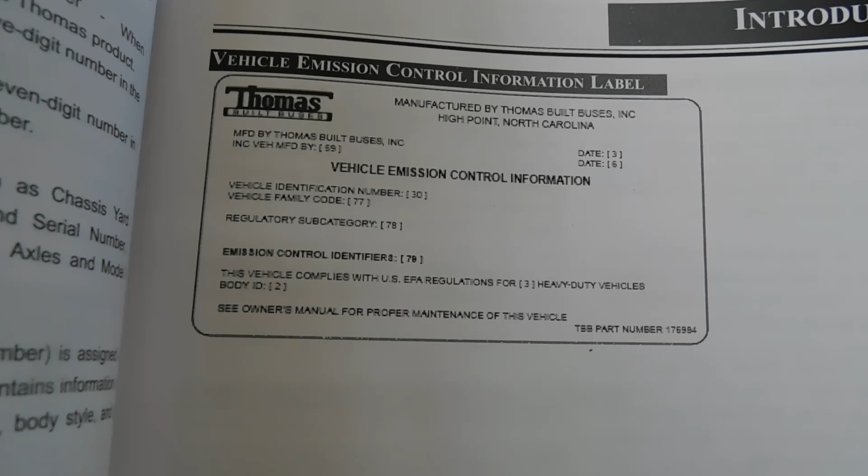So the first thing I'll show you is this sticker for the VIN. Basically it just has all the build information and the VIN and the body ID and all that stuff. And then you also have the vehicle emissions control information label - of course that's blank, but that's basically showing you what it would look like.

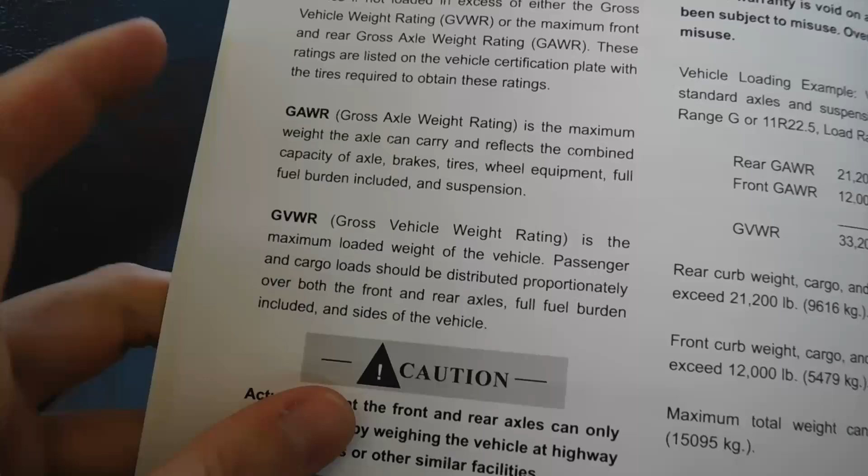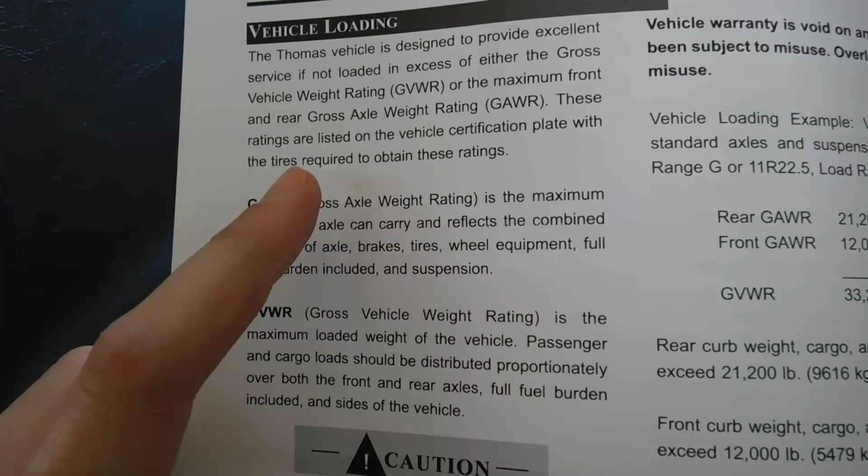They're just talking about the GAWR, which is the gross axle weight rating. Honestly, that is a term that I don't think I knew, so I'm learning something new, and I'm sure most of us all know the GVWR, which is gross vehicle weight rating.

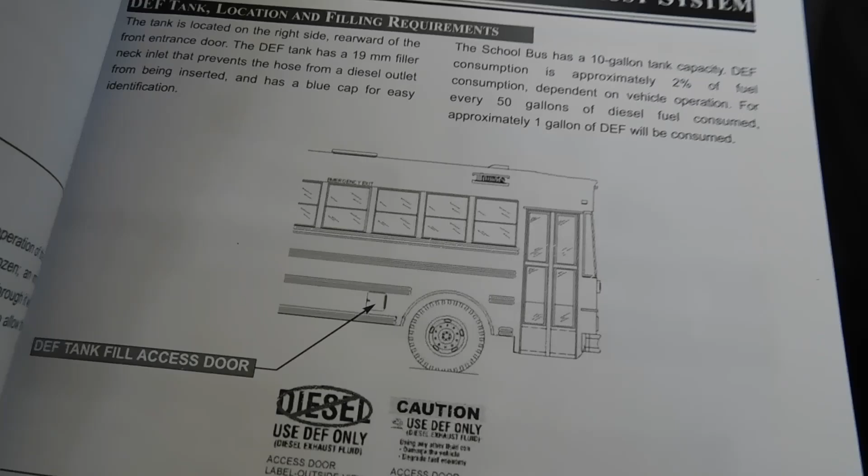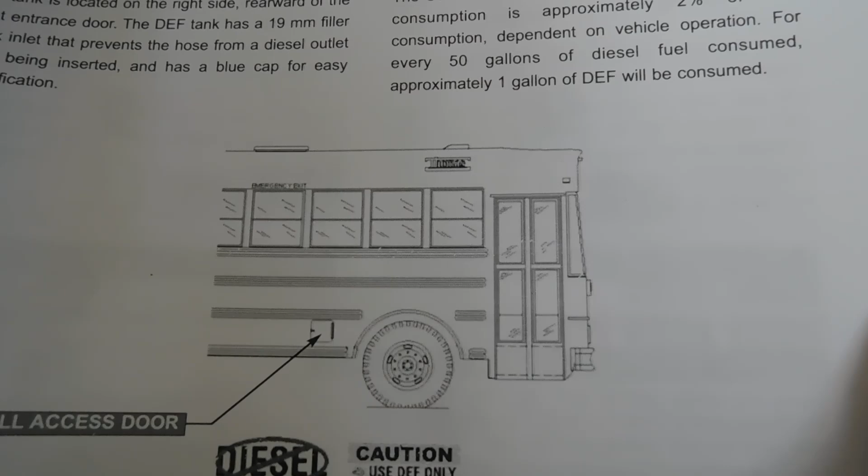So interestingly enough, in the section on the exhaust system, they do have a diagram of an EF, and you can tell that's the older front end, so that's not an EFX, but it's basically just showing you where the DEF tank fill access door is located on the bus.

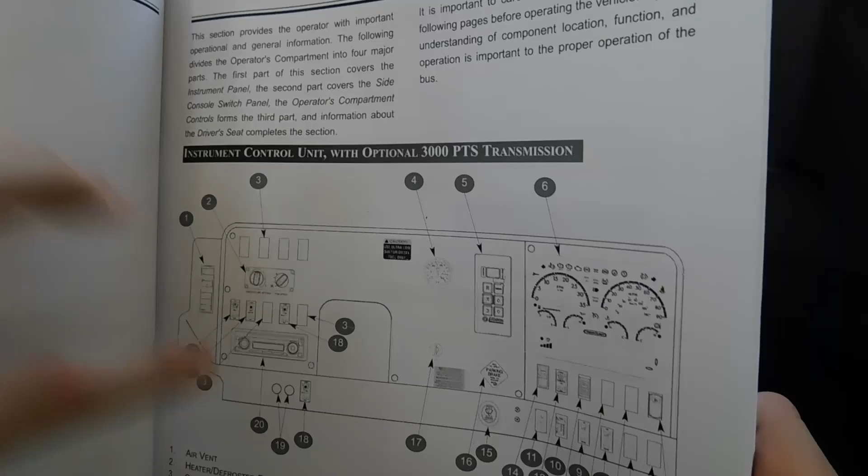So next we've got to look at the instrument control unit, which has always been an interesting thing to me. This one has the optional 3000 PTS transmission, so it's got a push button.

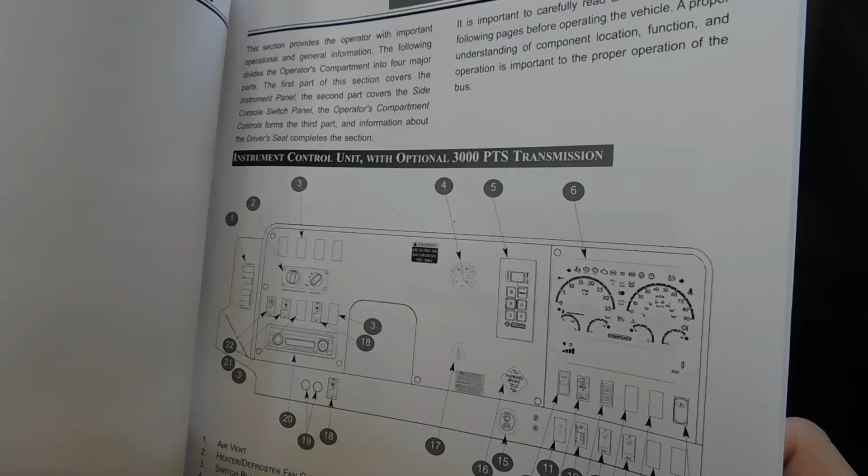The thing I've always found interesting with these buses, the EFXs and HDXs, is the location of the gauge cluster being to the right of the steering wheel. I've always thought that was odd. I've never... well, that's a lie, I've been on the EFX and HDXs, but I don't think I sat in the driver's seat of the EFX, though I know I've sat in an HDX driver's seat. I don't really care for how the gauge cluster is positioned, because you have to take your eyes away from the road. I mean, looking at a gauge cluster you might look down and that takes your eyes off the road too, but I'd rather look down than to the side, personally, but that's just me.

So over here, this is just kind of showing you the different parts you'll see up in the driver's area. You've got the driver's air vent, electronic heater and defroster. There's a switch blank. This is basically just telling you what everything is.

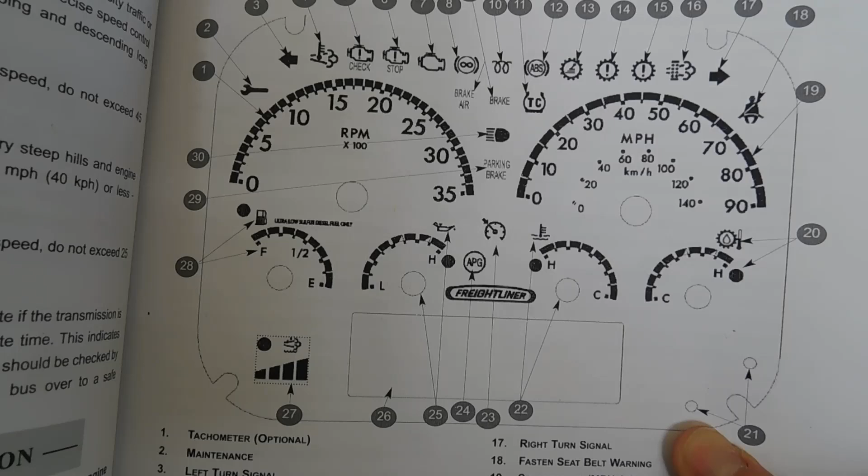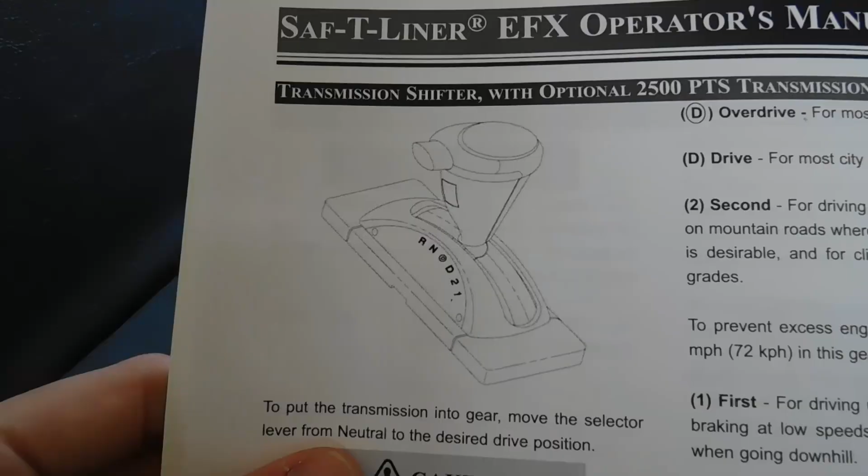First, here's a look at the EPA 10 instrument cluster, which I assume has all the stuff for EPA compliance, like the hot exhaust indicator and everything for a DEF bus. Here's a transmission shifter for a 2500 PTS transmission, which is a lever. But anyways, back to this — this is just a look at the instrument cluster.

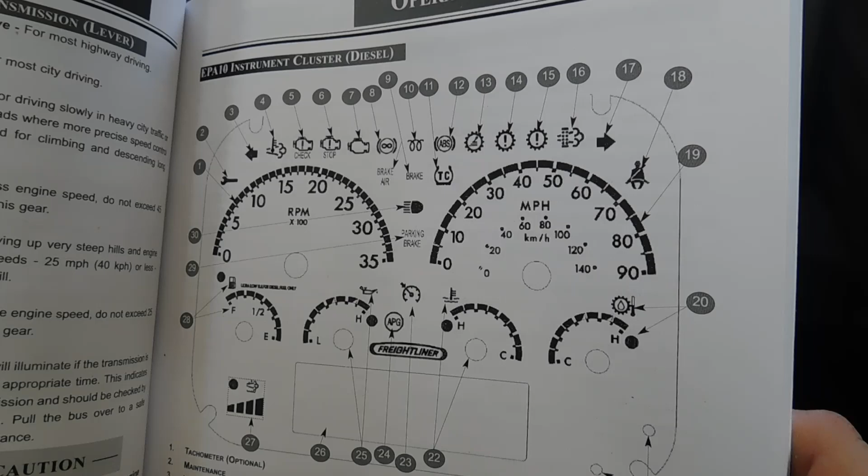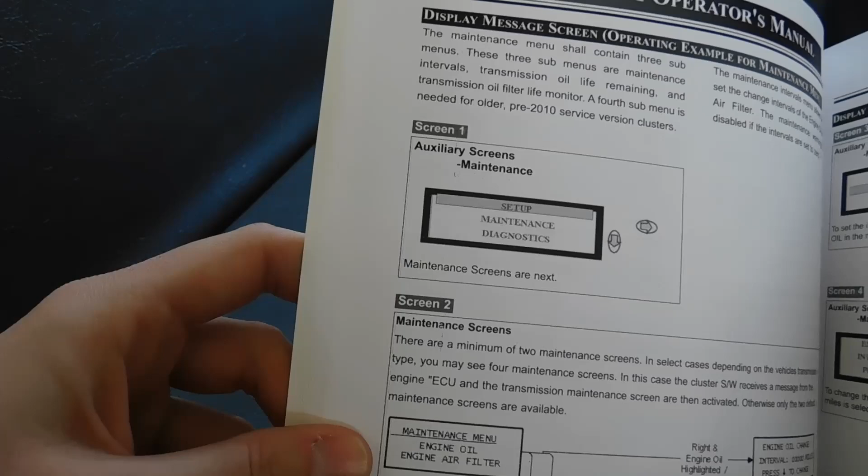They do have, moving forward, let's see what this is — we've got the display message screen, showing you the different things you can toggle through, and what the different messages might mean.

They also have all the different switches you can have on the bus. So you've got DPF, diesel particulate filter, manual regen switch, cruise control switch set and resume which is optional, cruise control switch on/off which is also optional. You've got the panel dimmer switch, headlight switch, pilot light switch with warning light symbol, 8-light warning, door control switch, windshield wiper/washer control and indicator, and the parking brake valve for air brakes, which you guys all know what that looks like.

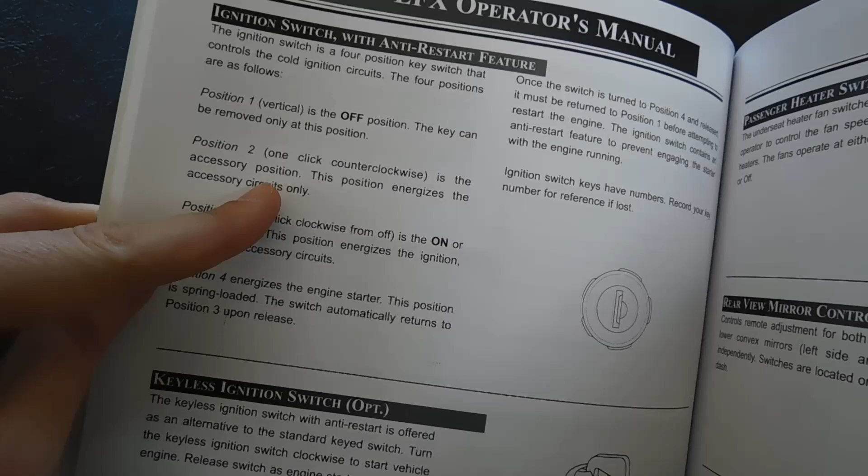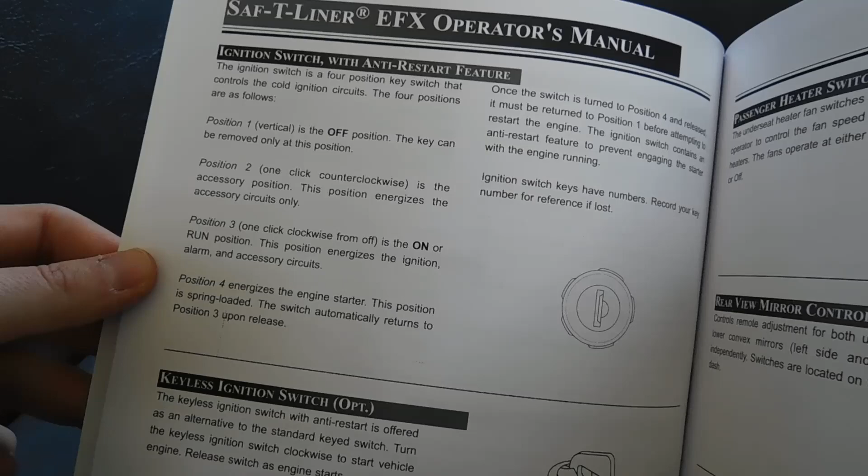Here's an ignition switch with anti-restart feature. It's an ignition switch with 4 positions: position 1 is off, position 2 is accessory, position 3 is run, and position 4 energizes the starter. The position is spring loaded — the switch automatically returns to position 3 upon release. So basically, a normal starter.

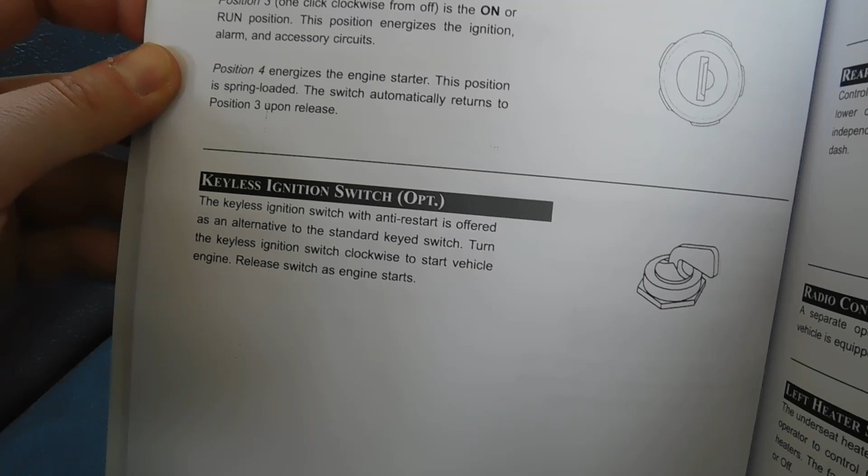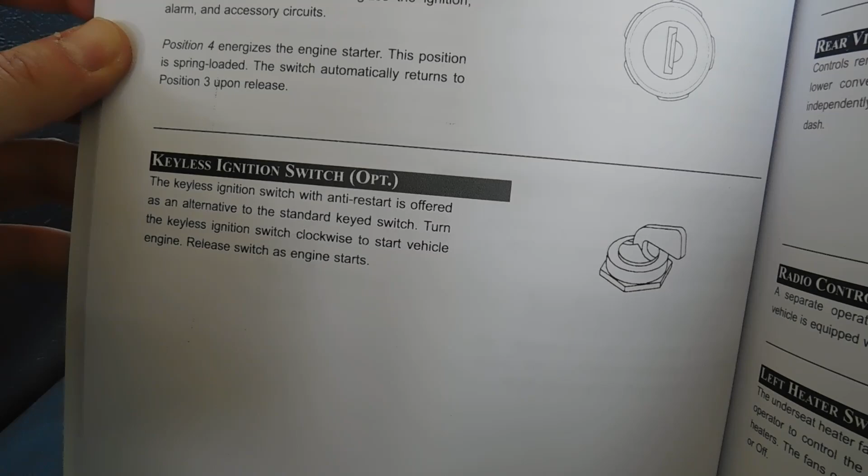This right here is not something I knew about — a keyless ignition, a switch with an anti-restart offered as an alternative to a standard keyed switch. You turn the keyless ignition clockwise to start the vehicle engine, and release the switch as the engine starts. That's interesting, not something I knew was offered.

Passenger heater switch, rear view mirror control switches, radio controls — see operator's manual — left heater switch low/high/off, optional. Let's see, we've got boost pump on/off, exhaust compression brake high/low optional, the retarder switch on/off optional, secondary reserve air tank drain optional, wet reserve air tank drain optional, and primary reserve air tank drain, also optional.

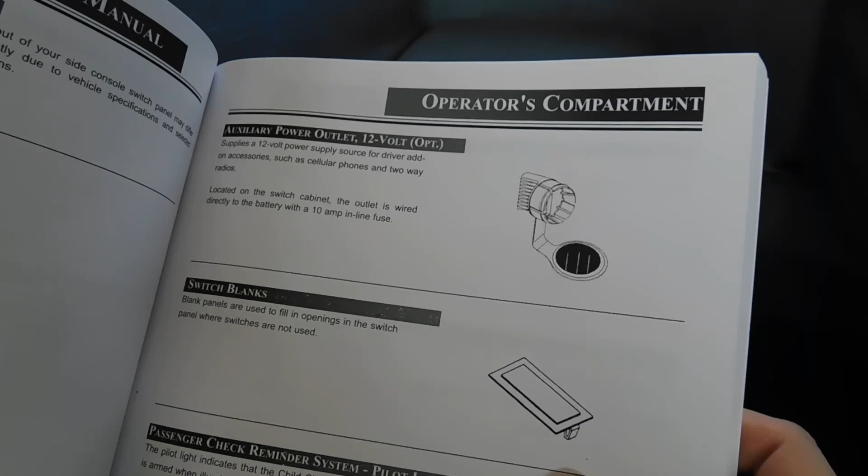Then right here we've got a side console switch panel, showing the switch panel that would be on the side next to the driver, with the 14 locations and what they can be. Over here we've got the auxiliary power outlet, 12 volt, which is like for a car charger or something like that.

Switch blanks, passenger check reminder system, pilot light, noise suppression switch. We've got the defroster fan switch, air horn, ID marker lights switch — both of these are optional, of course. Then you've got the driver's dome light switch on/off, optional, interior light switches, and the lift switch on/off.

This is something I thought was interesting, because our 61, the C2 we have that's a lift bus, has that switch, and it has to be on to operate the lift. I'm fairly sure our CEs don't have that — the key has to be on, but you don't have to flip a switch to operate the lift.

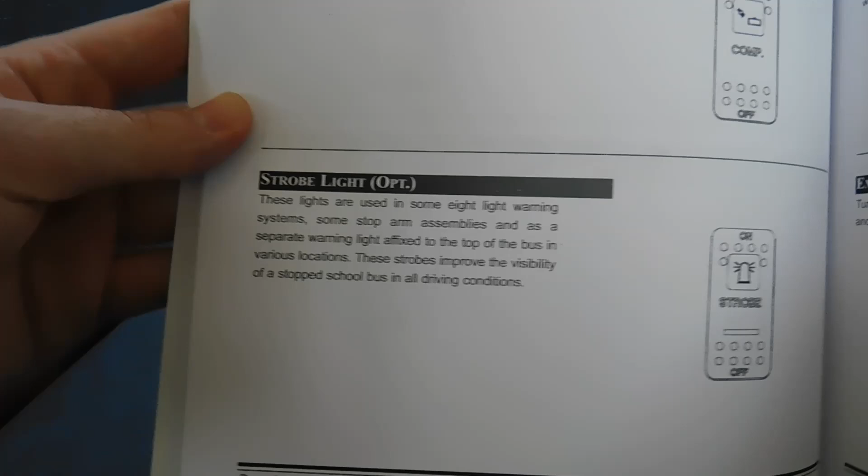Then we've got the outside speaker horn switch, which is kind of funny. It's got a little music note for the symbol.

Luggage compartment light switch, strobe light switch, fog light switch on off, crossing arm deactivation switch, which I always thought was an interesting option because it just controls the cross arm. Emergency door light switch, so that's like the lights, kind of like what 50 has above the rear door or the emergency exit, that would control that.

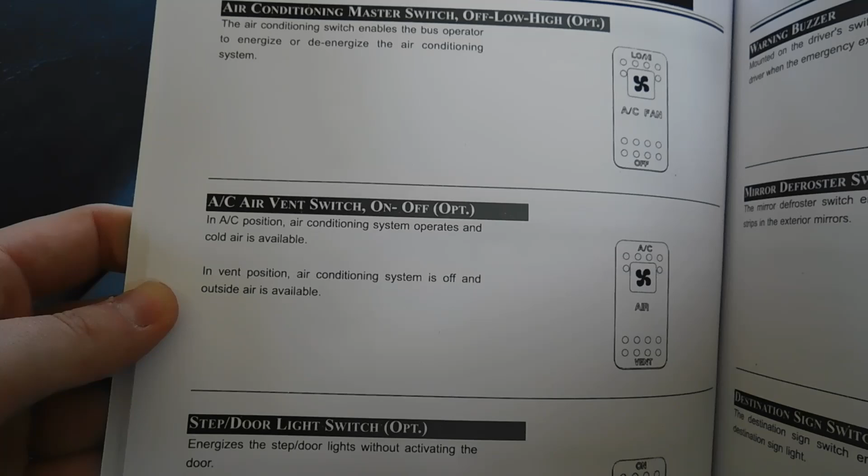Then you've got air conditioning master switch, off, low, high, optional of course. AC air vent switch, on, off, also optional. Step door light switch, optional. Warning buzzer, which is what alerts the driver when the emergency exit is open, of course.

Mirror defroster switch, and then destination sign switch, which that little icon is pretty much the same as what's on the destination sign switch on 50. Then we've got microphone jack, sander switch, override switch on off, auxiliary reserve air tank drain optional, chime on off optional.

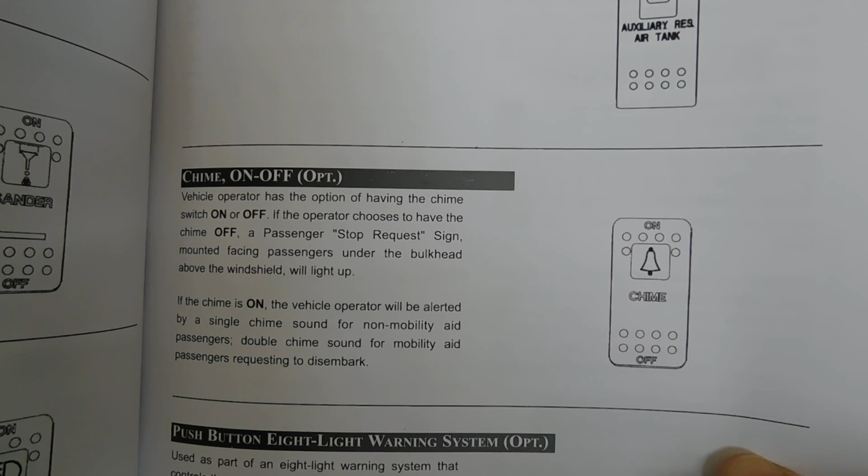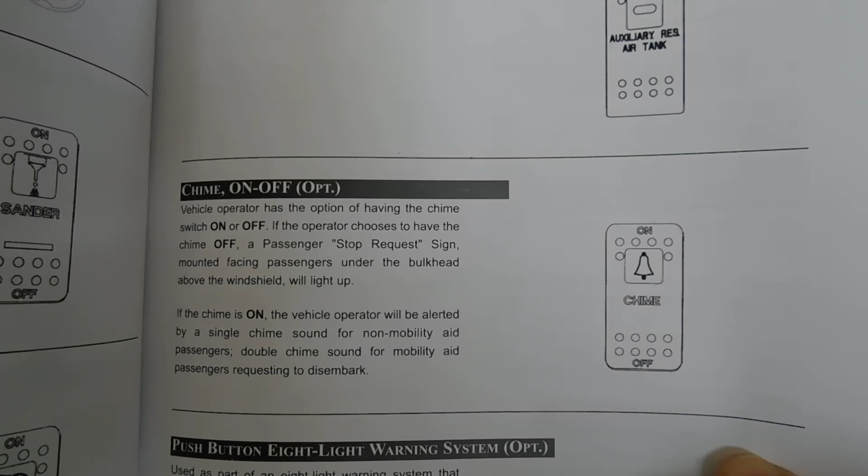So this is something, I'll read it to you. Vehicle operator has the option of having the chime on or off. If the operator chooses to have the chime off, a passenger stop request sign mounted facing the passengers under the bulkhead above the windshield will light up. If the chime is on, the vehicle operator will be alerted by a single chime for non-mobility aid passengers, double chime for mobility aid passengers requesting to disembark.

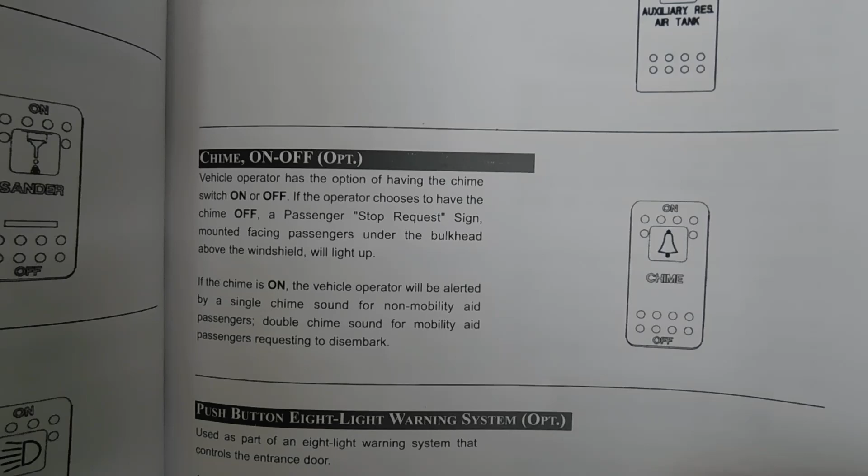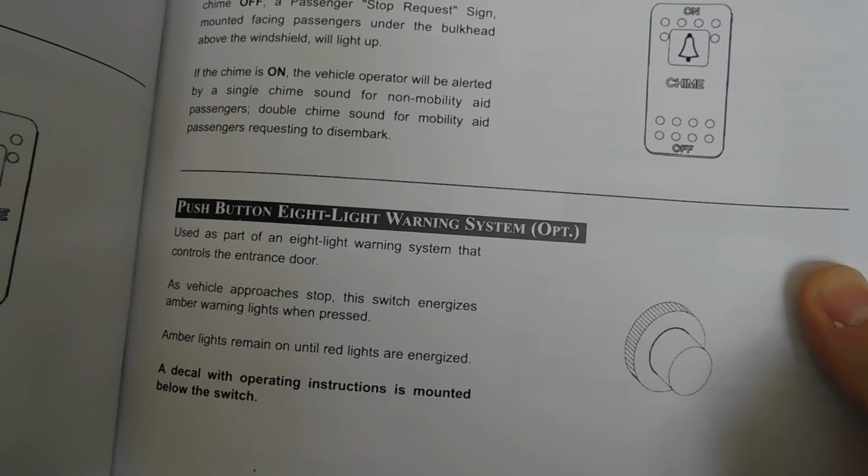So that's not necessarily for a school bus platform, that would be for commuter or something like that. Let's see, push button eight light warning system, so that's your little warning light start button.

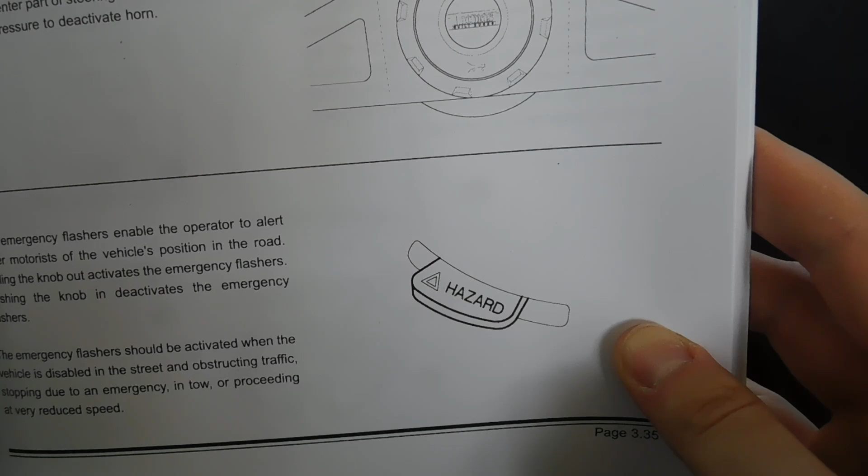So moving on, you've got a few more items. Here we've got the electronic accelerator pedal, brake pedal for hydraulic, brake pedal for air. Then you have the sun visor, horn button, and then you've got the hazard switch for the flashers, which is probably on the side or bottom of the steering wheel.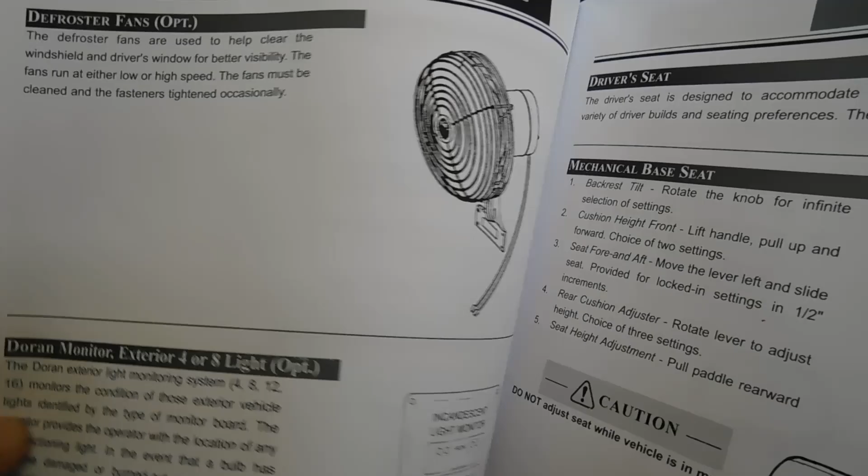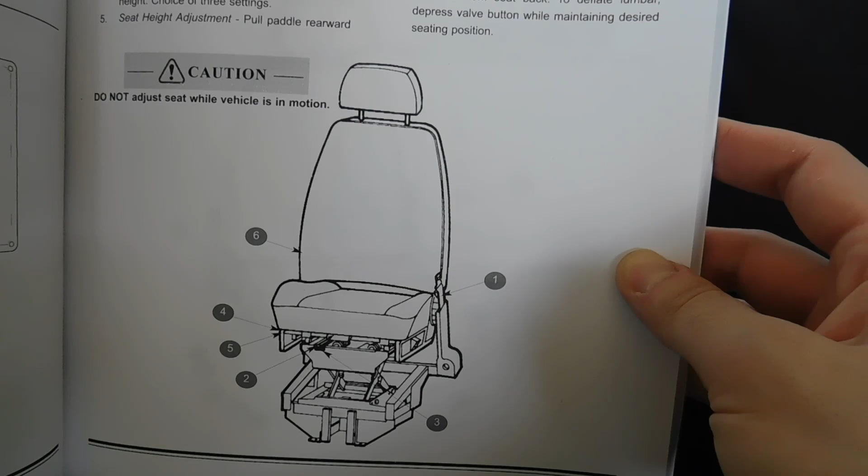There you've got your defroster fans, Doran monitor, exterior 4 or 8 light, optional. Here you've got your driver's seat, so driver's seat and then mechanical base seat.

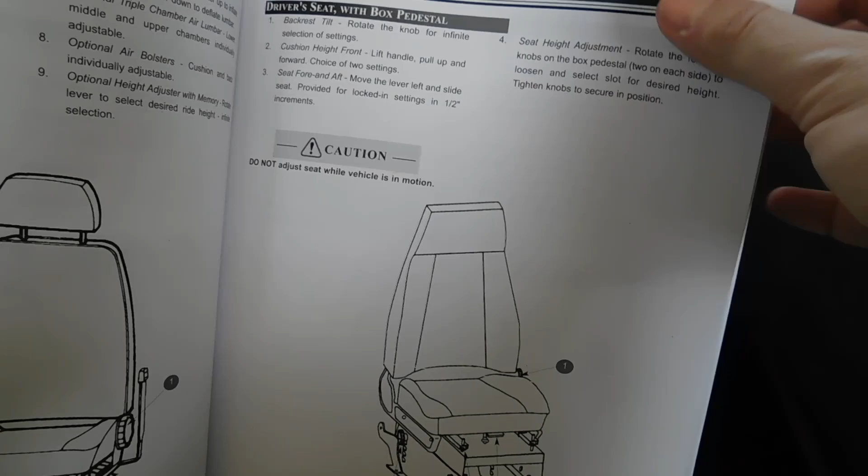And then there's the driver's seat belt continued. Here you've got the engine access door for the inside since it's a front engine transit.

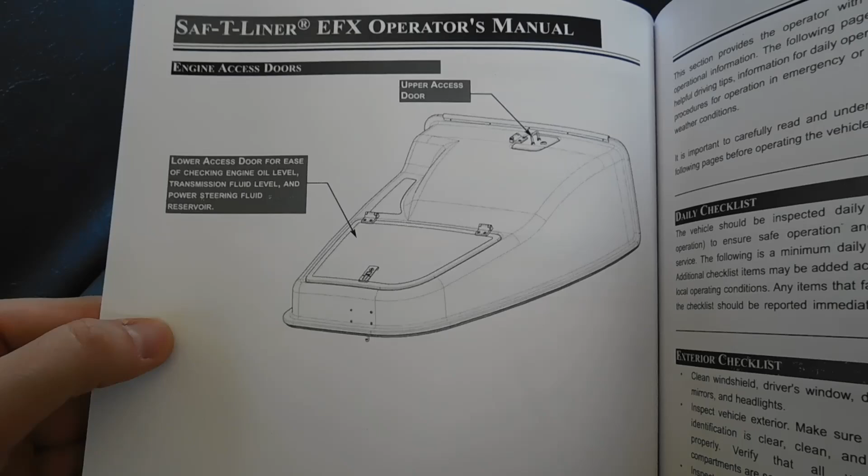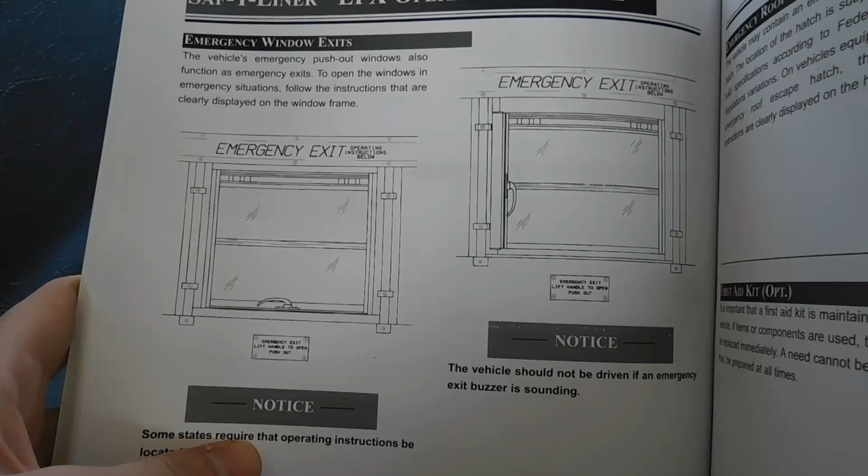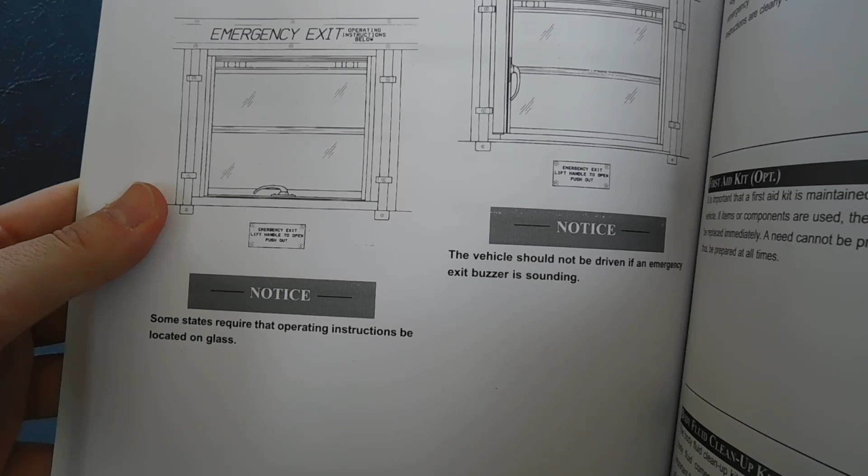Moving on, here are your emergency window exits, an illustration of the interior. So you've got your handle on the bottom here, or you can get the handle on the side. And then it does say that some states require that operating instructions be located on the glass. The vehicle should not be driven if an emergency exit buzzer is sounding.

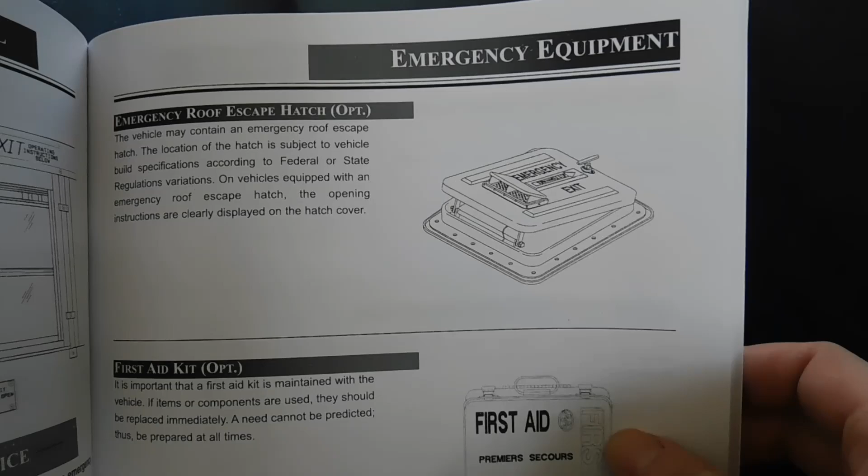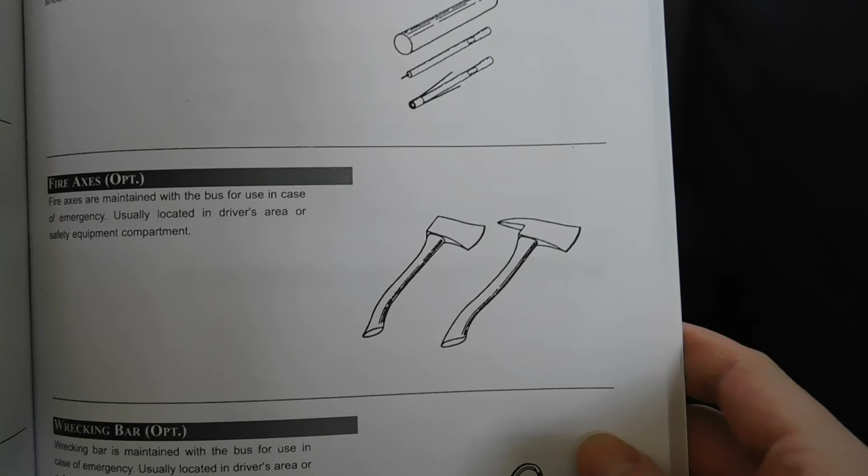Over here you've got your emergency roof escape hatch, first aid kit, body fluid cleanup kit, seatbelt cutter, fire extinguisher, triangles, fuses, flares optional, fire axes, wrecking bar.

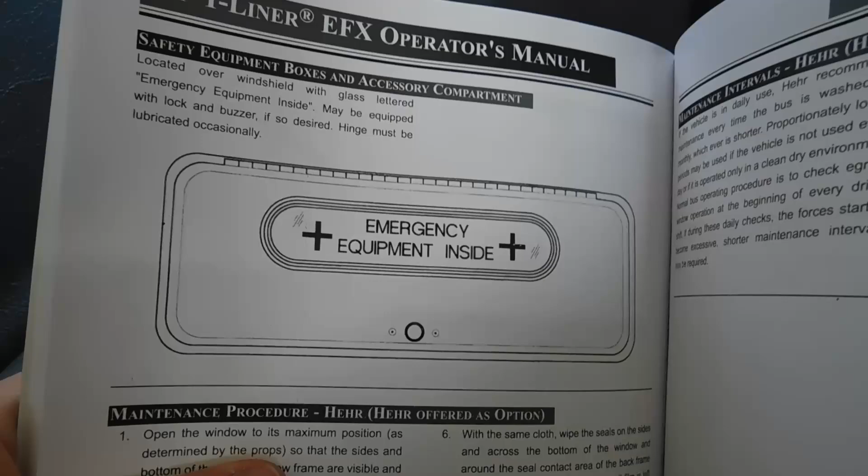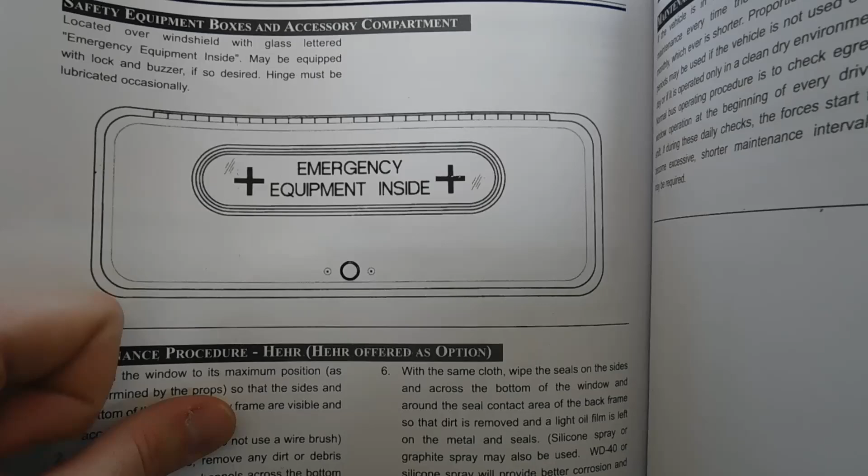So here's your safety equipment boxes and accessory compartment. This is the door for what's on the bulkhead where you'd keep the flares, triangles and safety equipment. And it's got the little glass or plexiglass - yeah, so this says with glass lettered emergency equipment inside. So I didn't know if they had switched from glass to plexiglass or not.

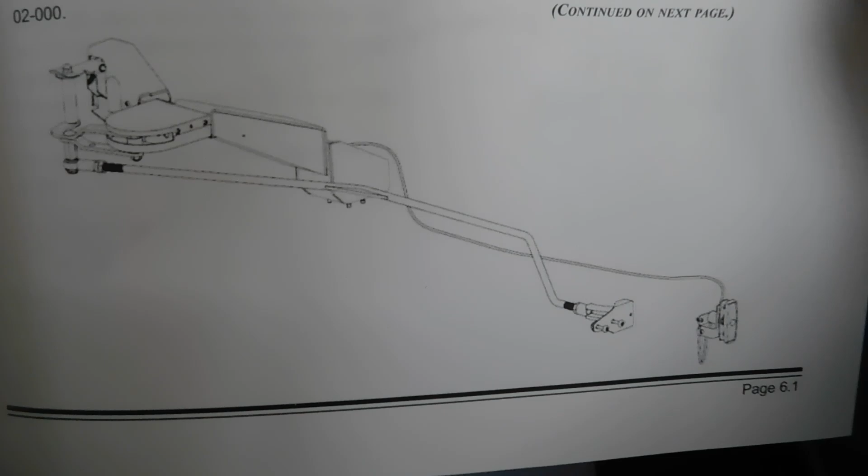So here's a part on the outward opening door. You've got manual door opening adjustment, so there's a front of an EFX, and it's giving you the dimensions of the door. There's the manual door mechanism, and then where the manual door mechanism attaches to the door itself.

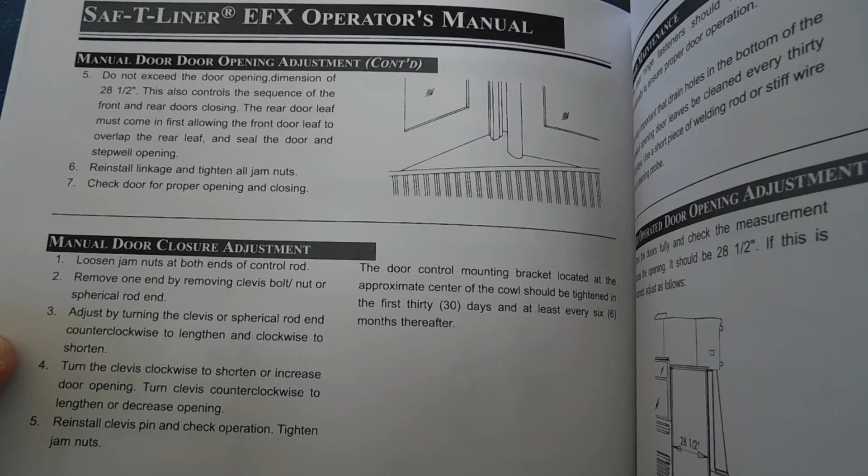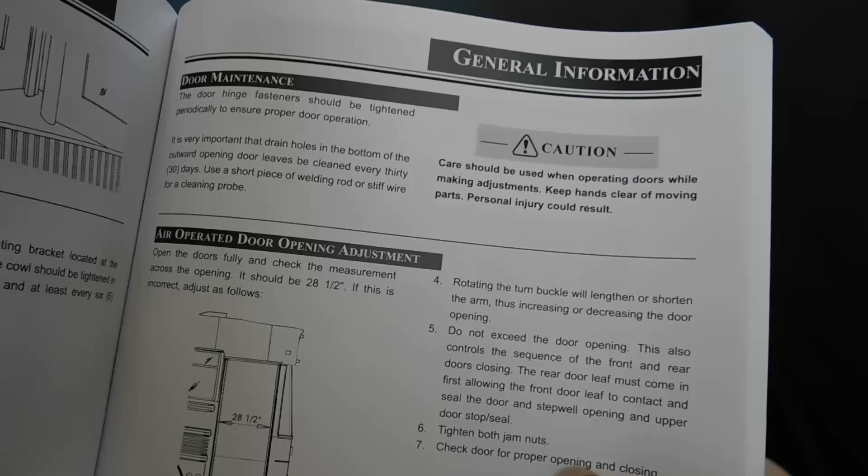Here you've got the manual door opening adjustment continued, and then manual door closure adjustment, and there's the rod for the manual door again. Let's see, door maintenance - that's just telling you door maintenance. Air operated door adjustment, so that's for an air operated door.

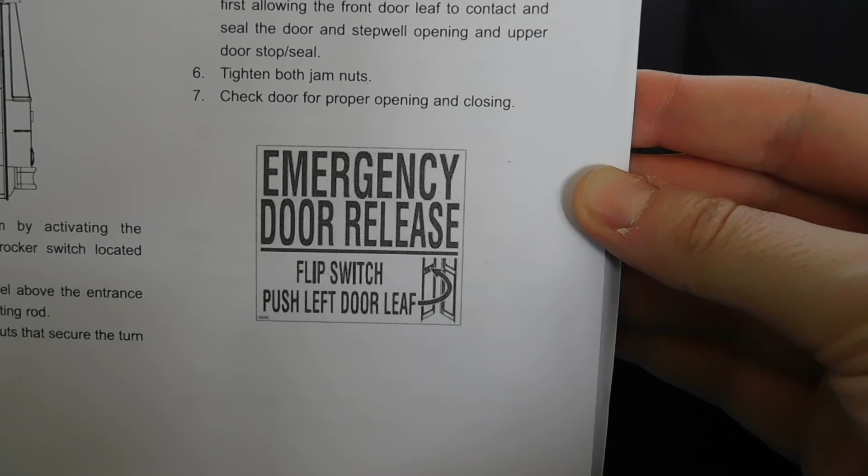There's your emergency door release sticker that Thomas's have, there's that same sticker again. Over here you've got a diagram of the door and the different components that allow the door to be opened.

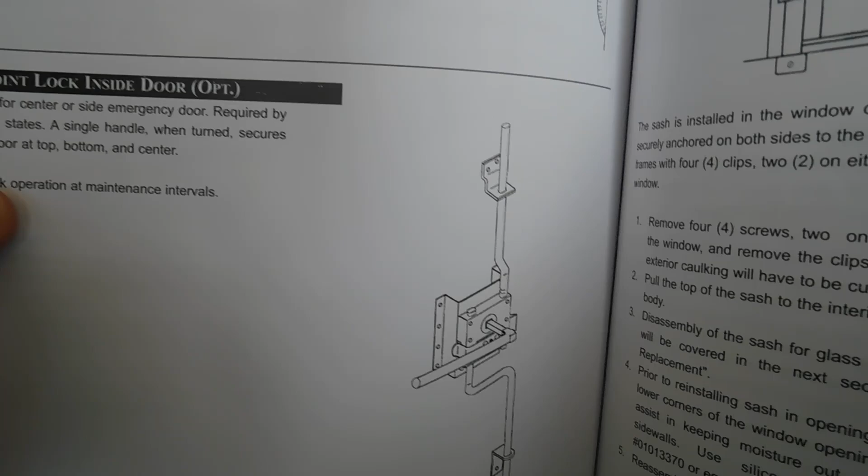Right here you've got a side emergency door, so there's your demonstration of that, which that side door honestly looks like it's on an older Transit, but they're still trying to demonstrate a side door. Three-point lock inside door, so that's for an emergency door lock.

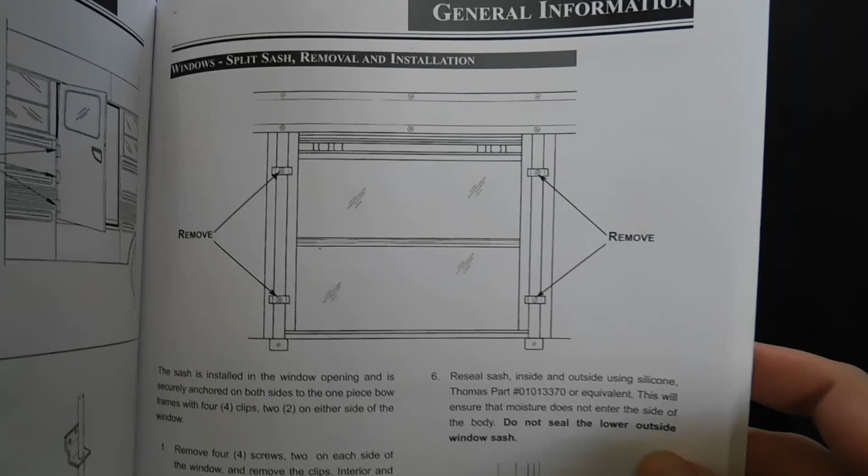Over here you've got your window split sash removal and installation, so that's telling you how the windows are removable and how they are installed.

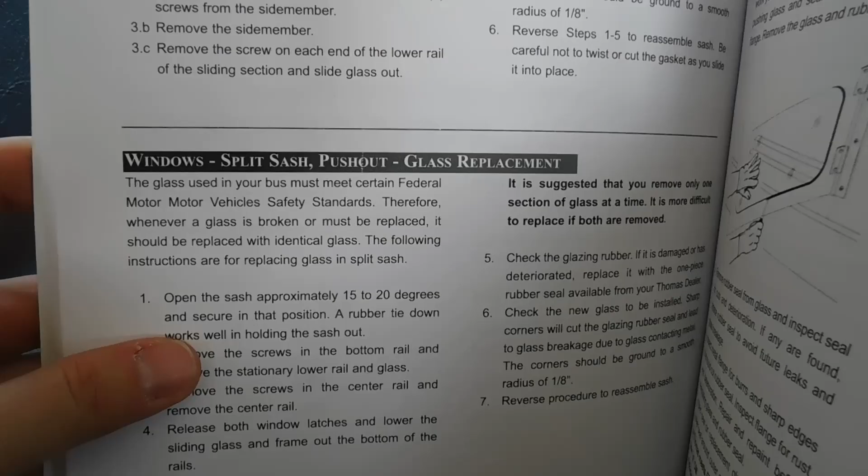So the next section's on glass. You've got glass replacement, telling you about the windows split sash push out glass replacement. Over here it actually shows you how to replace glass, like in the rear door, for example.

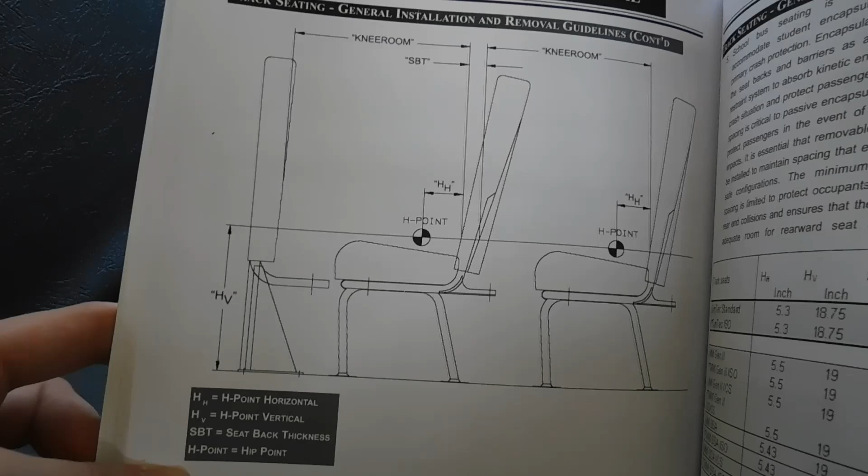Here's a diagram for the track seating, like on a wheelchair bus. This is demonstrating how much space is needed between the barrier, the seat, and the seat behind it when you're spacing them. So if you remove a seat and put it back in, there's a certain amount of space that would be required for those seats when putting them in.

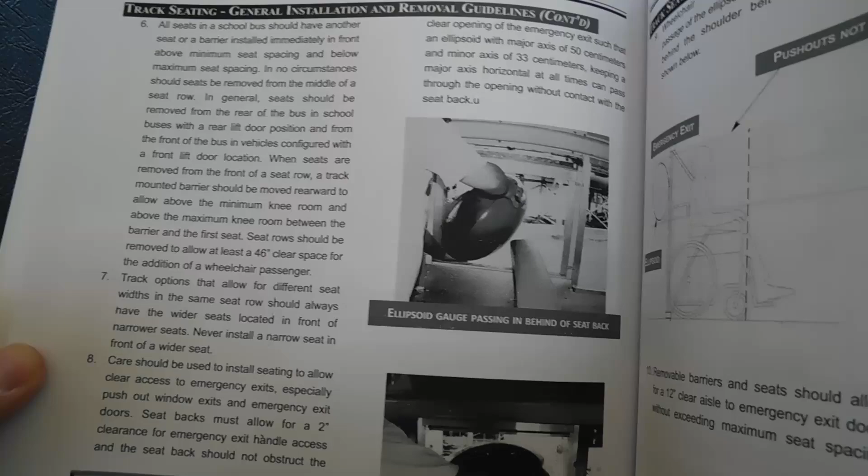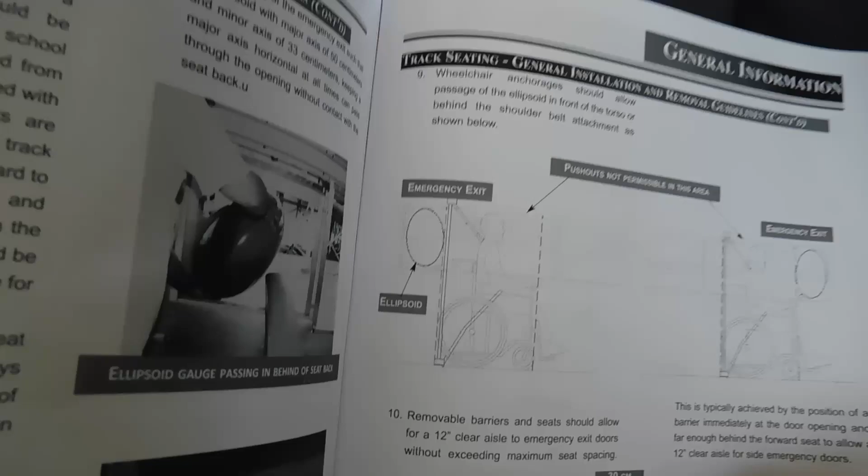This page here is basically just showing you track seating, general installation, removal, continued. There's this little gauge you can get that'll help you space out where you're supposed to be putting the seats and or a wheelchair. That's interesting to see.

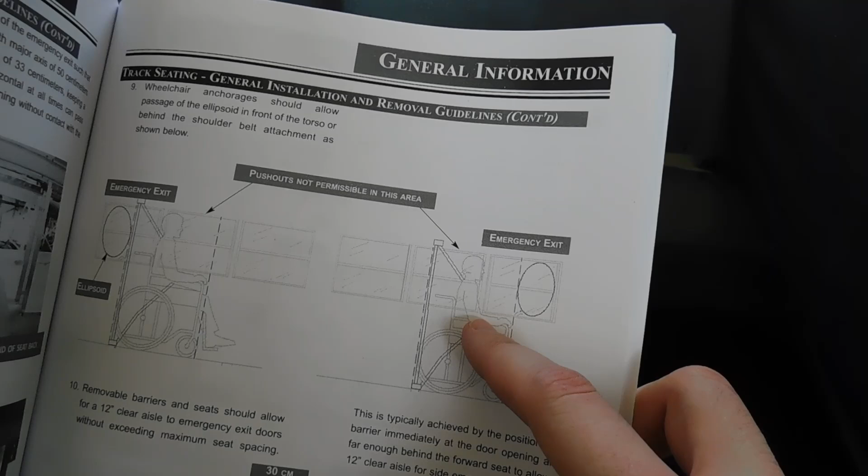Push-outs, like you can't put a push-out window where you're putting this wheelchair. So this would need to be right here. That's what I think that's demonstrating.

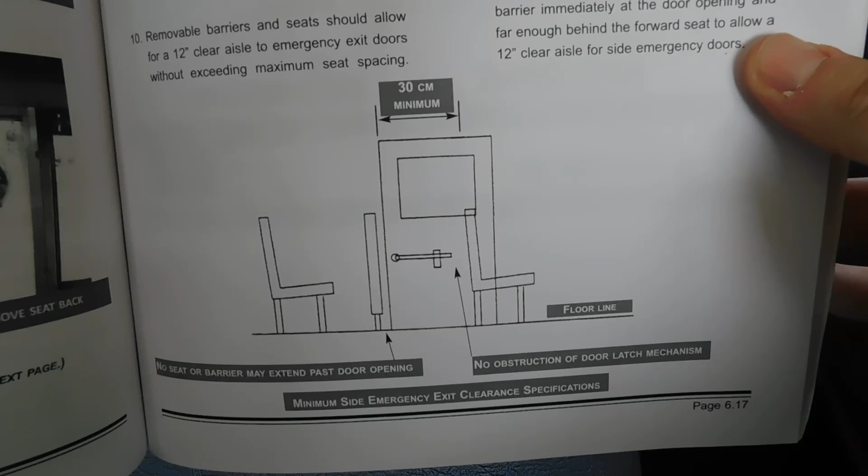So there's the diagram of a side door with the barrier, and it says no barrier may extend past the door and no obstruction of the door latch mechanism, which is interesting because some buses do have a fold-up seat, like 66 had a fold-up seat, for example.

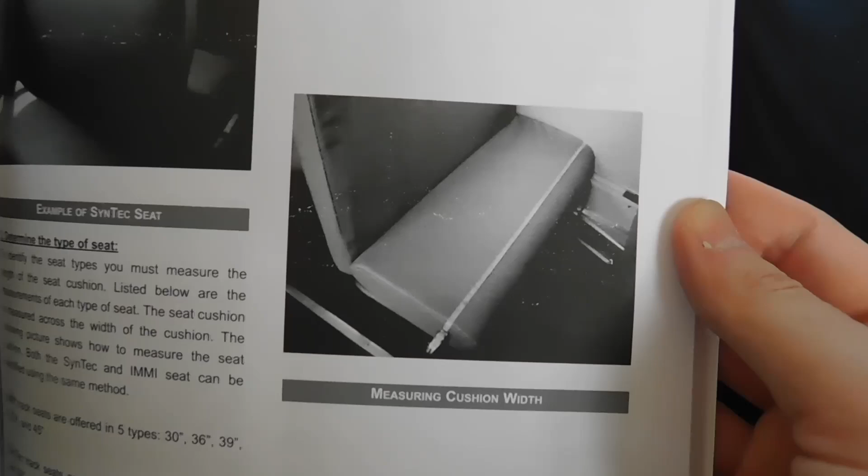So here we've actually got some pictures of the track seats. There's a picture of an integrated seat with the car seats in it. There's another picture of a seat, then you've got seat bottom with the measuring tape, because that's measuring cushion width.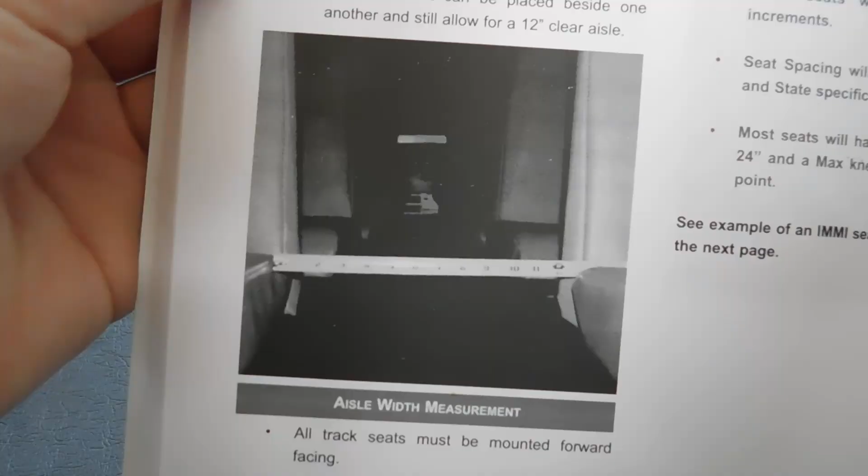All track seats must be mounted forward facing. I don't know who would think to mount one rear facing. There's an installing track seat, like a diagram to show you how to install it.

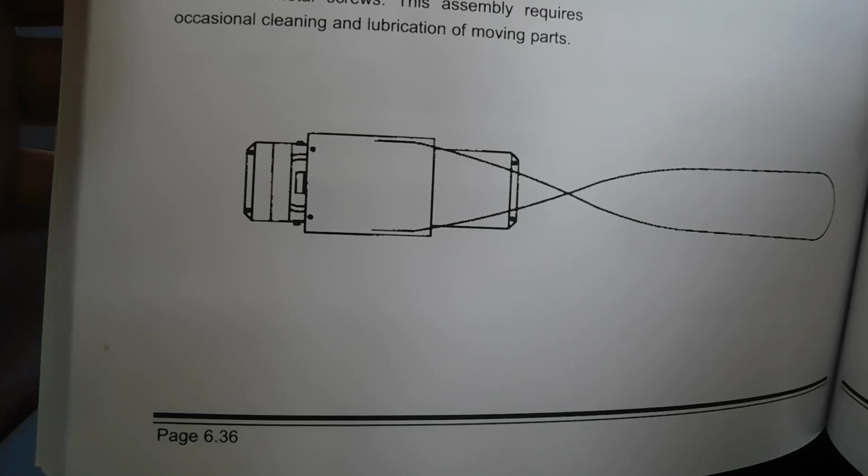So here we've got the air, electric, stop arms, crossing arms. This is for the stop sign and then the cross arm. And over here you actually have a spare tire carrier, which is optional. So that's the diagram of that.

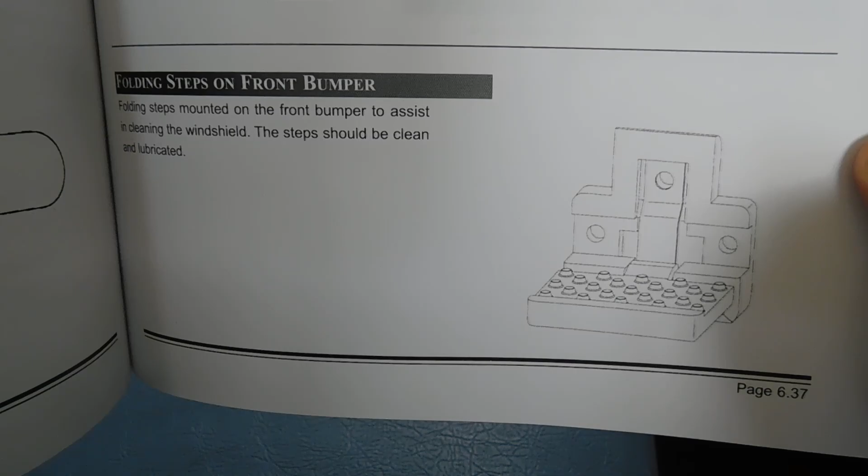Then you have your folding steps on the front bumper to help the driver when cleaning the windshield. Then you've got your backing horn and heavy duty backing alarm, air restriction indicator, then the front access latchkey location.

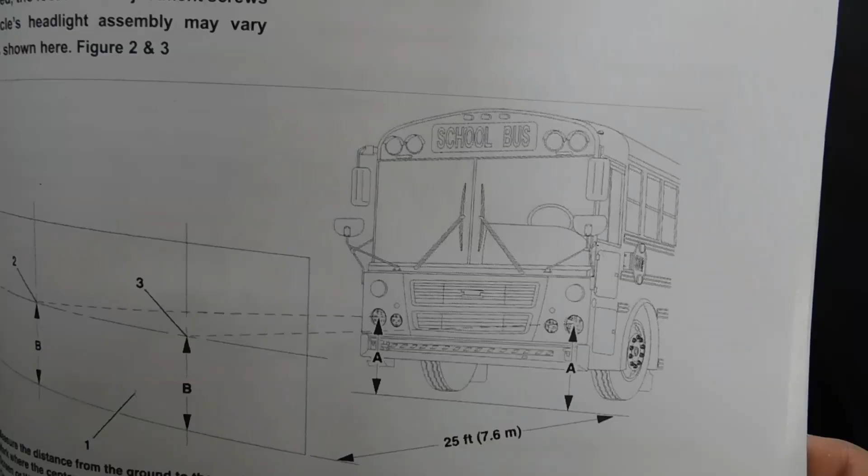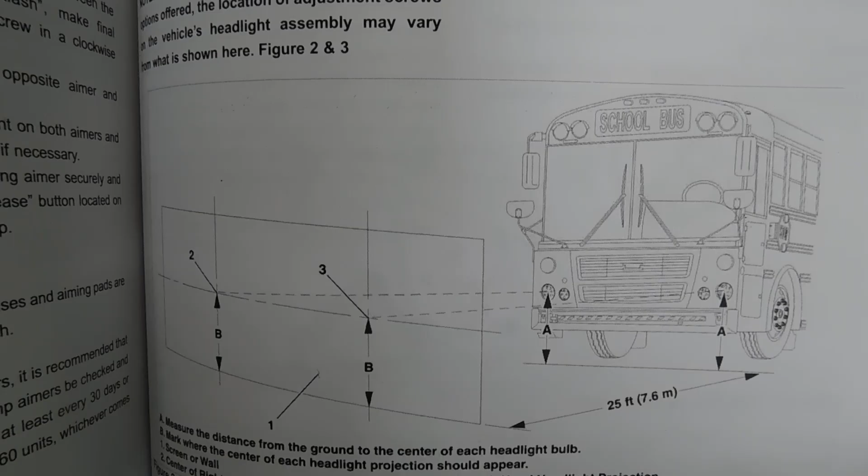So the key to access the front panels for the headlamp and wiper panel is located in the dash storage compartment. Here's a part for headlight aiming, an interesting diagram of the front of the EFX, basically showing where the headlights should be aimed. There's a second diagram for headlight aiming from a slightly different angle.

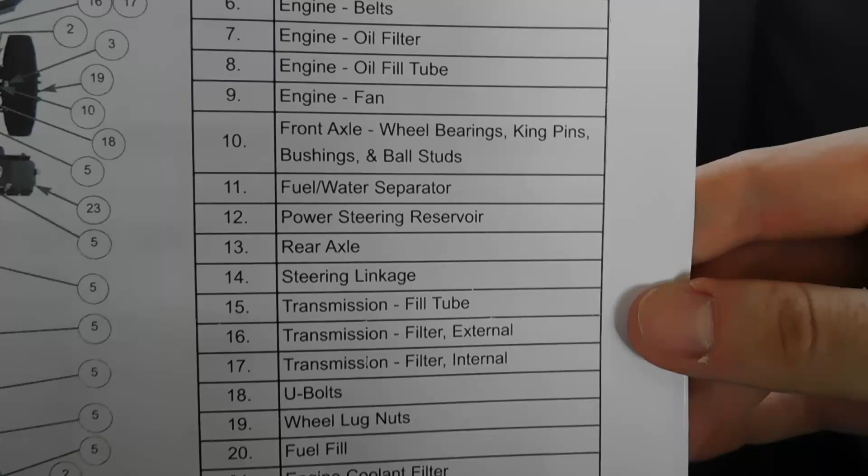Moving on, we have service inspection points, with a picture of an EFX chassis, and there are different inspection points marked out on the picture that need to be serviced and inspected.

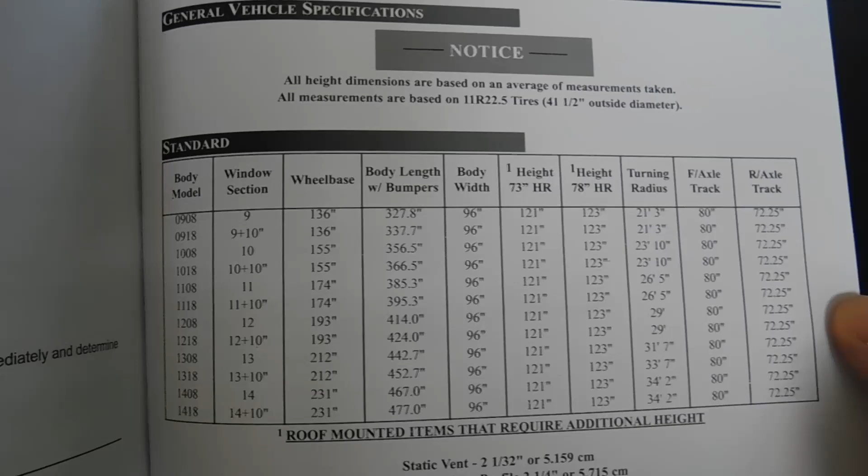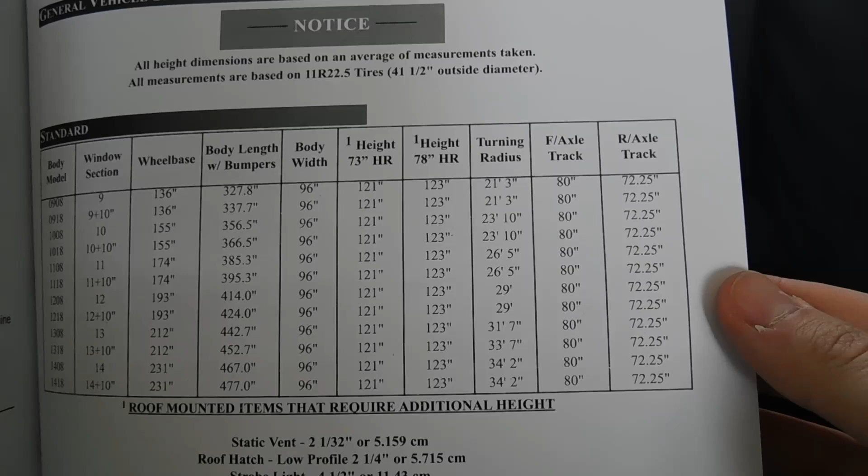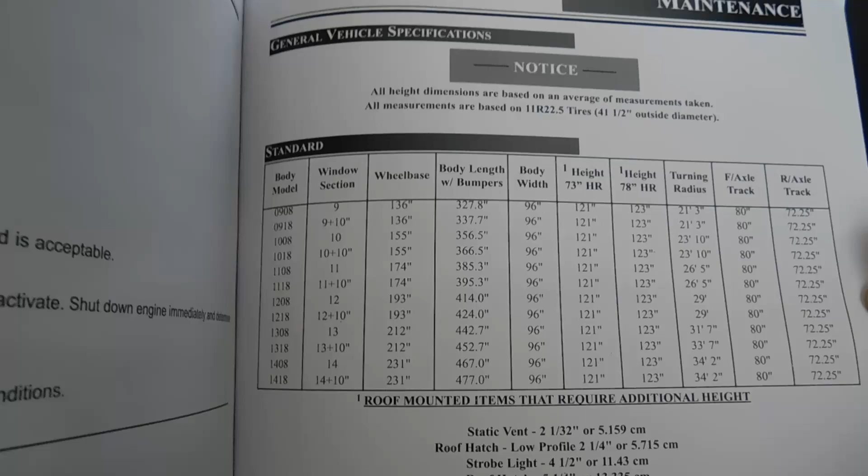So here we've got general vehicle specifications. You've got different body model numbers and the different window section sizes, wheelbases, body length with bumpers, body width, height, 73-inch headroom, 78-inch headroom, turning radius, front axle track, rear axle track, and then that's standard, and here's your metric.

So then at the back of the book, you've got a driver's daily inspection and condition report, which you could make copies of if you wanted to.

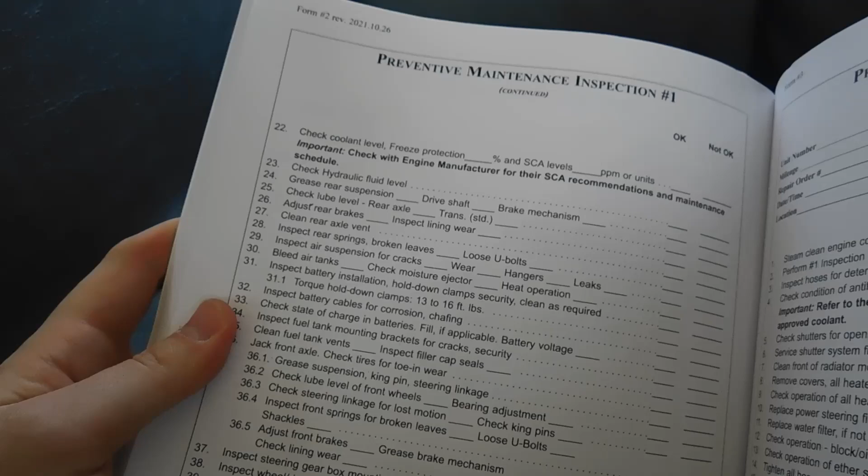Then you've got a preventative maintenance inspection, number 1. Again, something to make copies of. And then it's got a back to the preventative maintenance inspection.

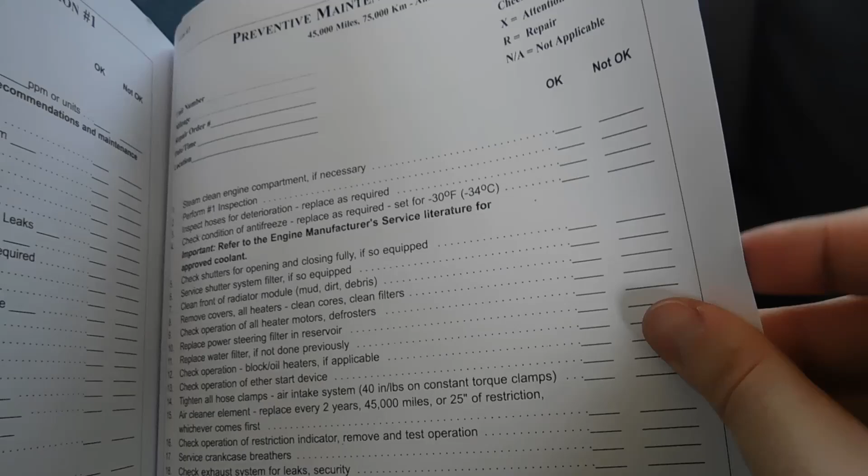Then there's a preventative maintenance inspection, number 2, and this is at different mile intervals. It's just got the different points to check for that particular inspection. It also has a back page.

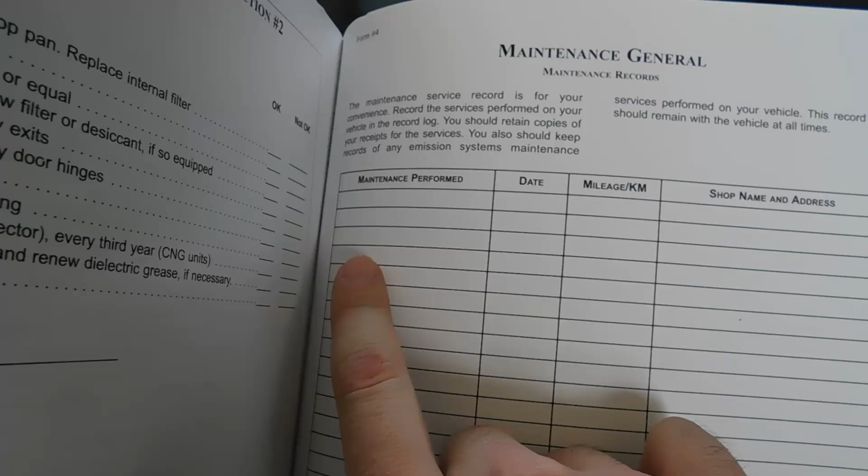Over here you've got a maintenance general, so like where you would basically record all the maintenance that that particular bus received over its lifetime. And then the last 2 pages are blank.

So that's pretty much it. I tried to get the most interesting stuff that was in the manual, because a lot of this obviously is reading material, not necessarily pictures. But I at least wanted to show you guys some of the stuff that was within this manual.